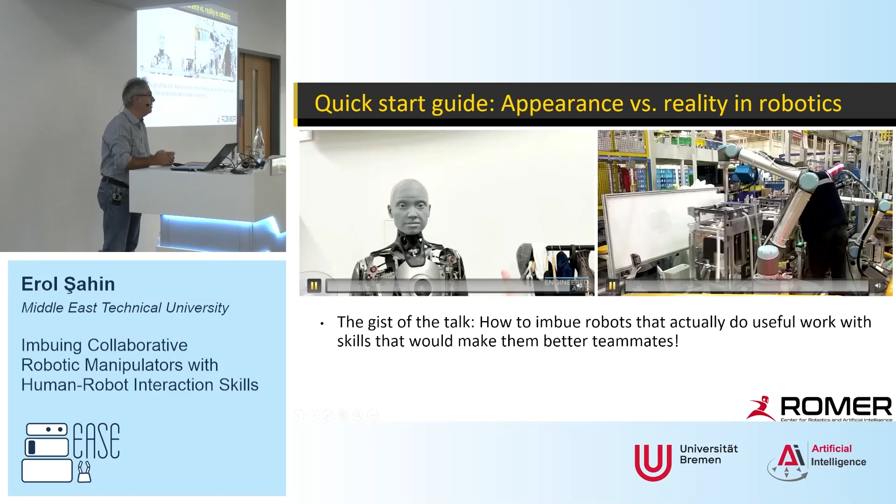And for this, as I said, if my video works, I'll show you. Again... see if it works, okay good. So, and now it's, okay good, let's see.

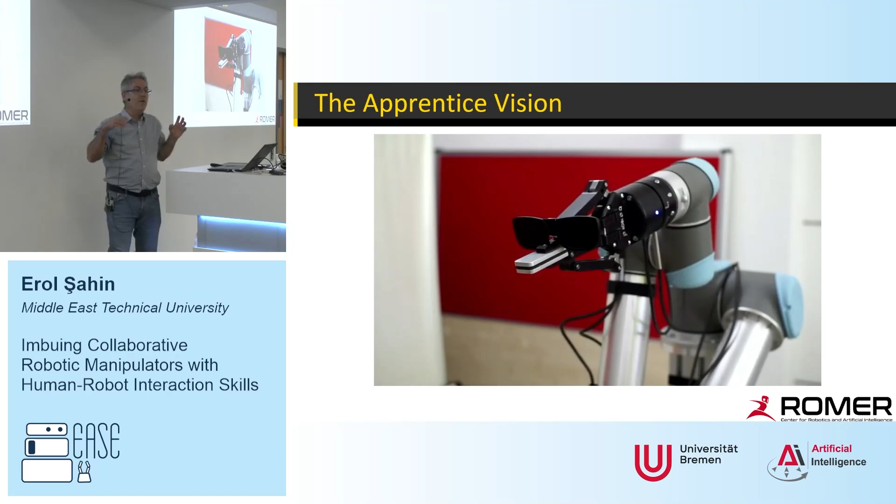Good, okay. Now my motivation in this line of work is that when you look at these robotic manipulators, and when you go to the actual assembly lines, you see that whatever those workers do in terms of manipulation is beyond what we can imagine to do with actual robots. So the best that we can do for us is to aid the worker.

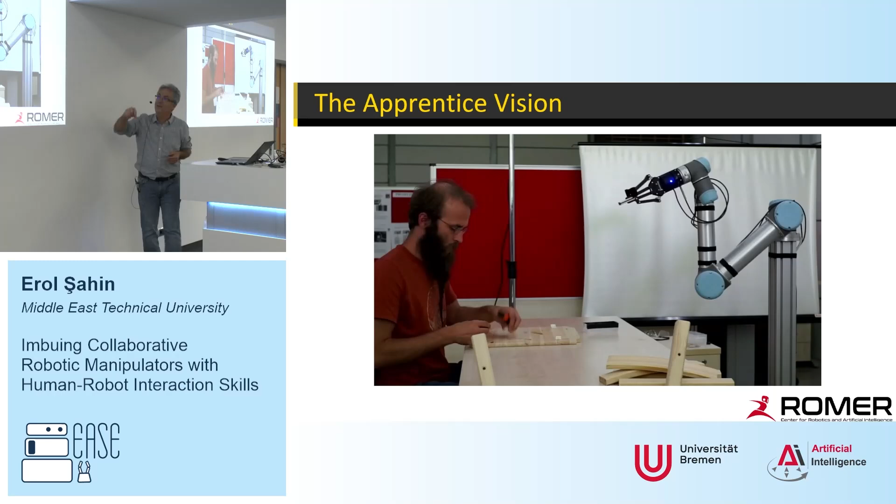There's this assembly worker, and in this case we have this scenario where my student is assembling an IKEA chair. Look at the manipulation tasks that he's doing. Can this robot do it? No. Will it be able to do it in the near future? No, okay? We have these nice hands, but you don't see them deployed. When you go into the industrial side, you have these jaw grippers, they sell for quite a large amount of money, and they just have one degree of freedom like that.

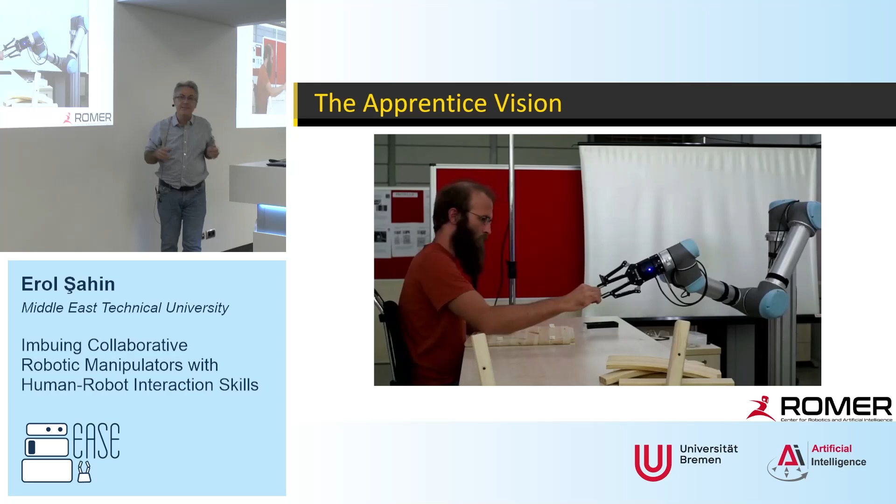And as such, there's no way you can do this unless you have some attached tools that are really specific for this task. So the idea we had was, instead of robots doing the work, why not have the robot work like an apprentice, just giving the worker the tools and the parts, such that instead of this guy carrying out his work in 60 seconds, if you can make him do it in 50 seconds, that's a 20% gain right there, okay? So that's the idea.

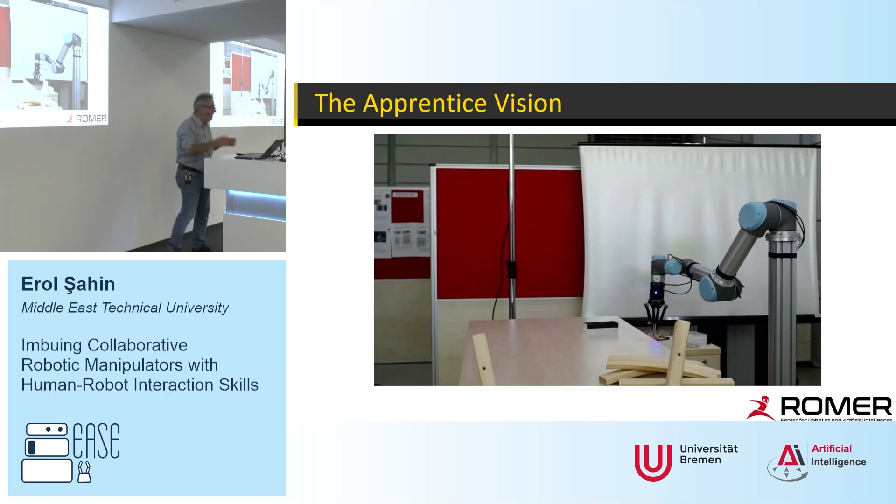But when you do this, this robot will be a companion, and it needs to be a little bit smart. It needs to understand how the human is doing the work, his state, looking at him, because maybe he's doing it at his own pace. And it needs to have really basic nonverbal communication such that they can have some kind of a connection. So towards this, this is our kind of trailer scenario. I'll show you one more video, and then I'll move on to the last thing, to my actual lecture planned today.

Which is here. Now I want you to, again, good, okay. So this is the view that you see from your glasses, this is your first-person view, okay? So does it come alive?

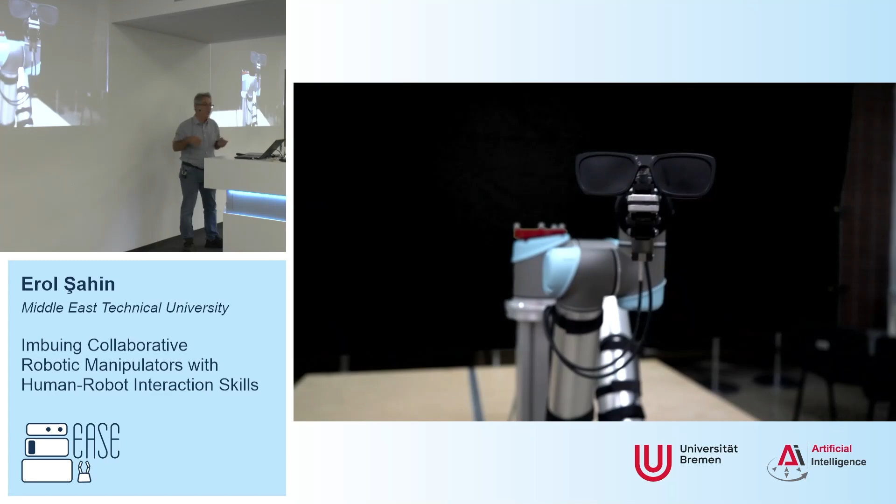Huh? Okay, so what it's doing is it's tracking the human. We have this motion capture, but you can do this without it. And then we just have this gazing, it doesn't have eyes, these glasses are dummy, okay, it's my old sunglasses that I attached there. But even with that, you see the iCub, and as I said, it has these nice basically eyes which follow. But what you've seen was that directing the gripper to someone induces a gaze.

You feel the gaze on you. And if you just make it kind of like this, then you just feel like so live and so fluid. Then you get much better human-robot interaction than you would get with a nice thing.

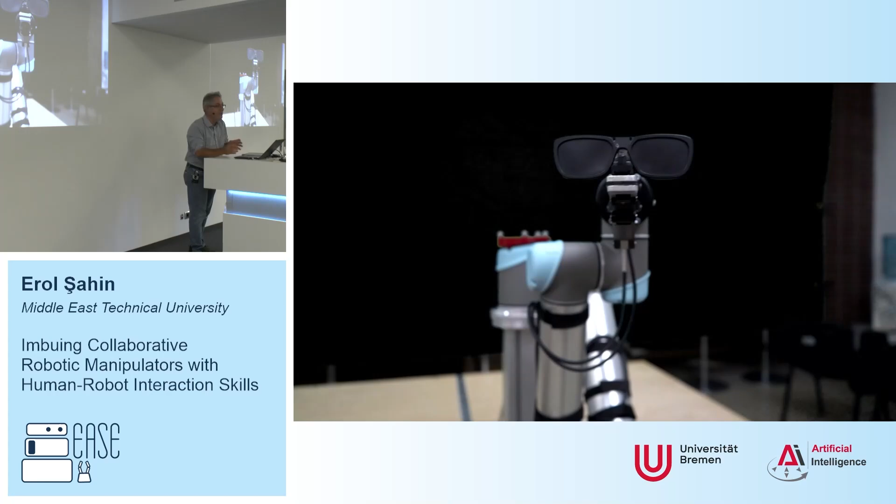With this, basically, what I will do is I will stop here, and if you come to my lecture tomorrow, I will move on to my actual lecture that's planned for today.

Okay, which is this. Let's see if I can. Good. Yes. Okay, so I was asked, I didn't realize this was kind of like two different phases, and I was asked to... no, why is it not showing up here? All technical. I don't know why. Now it's here. Okay, the projector problem, that's the NP complete problem that will never ever get solved in our lifetime. We have new connectors, new projectors, new interfaces. The problem still is there. It gets even more worse.

So I will give you an introduction about these robotic manipulators, which I'm working on. And in doing so, I was told that this audience was more knowledge representation, basic background. So I'll try to be basic. If you know it, it may bore you. If you don't know it, it may become difficult to you. So I know that I will never make all of you happy. I apologize for that in advance. But I'll try my best to give you an idea of what it is, what is required, the basic concepts to do that.

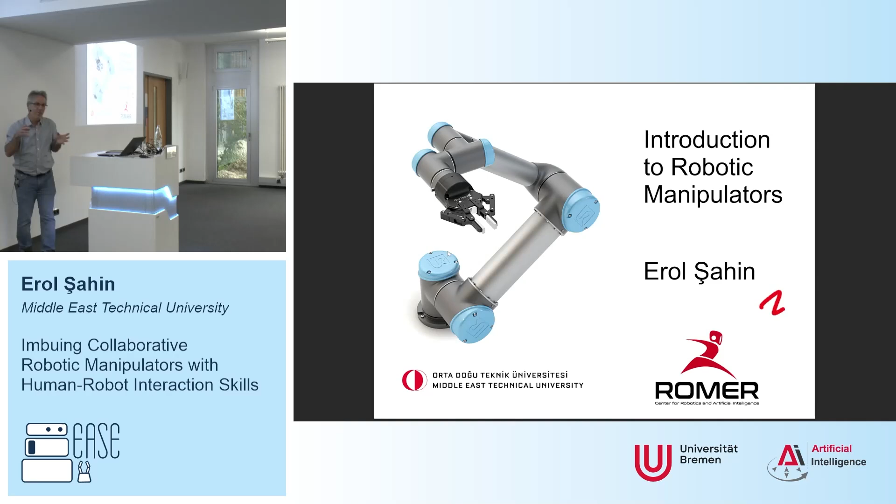So I'll give you a brief lecture introduction about robotic manipulators and introduce some concepts. As I said, this may bore some of you. So, arm type robots.

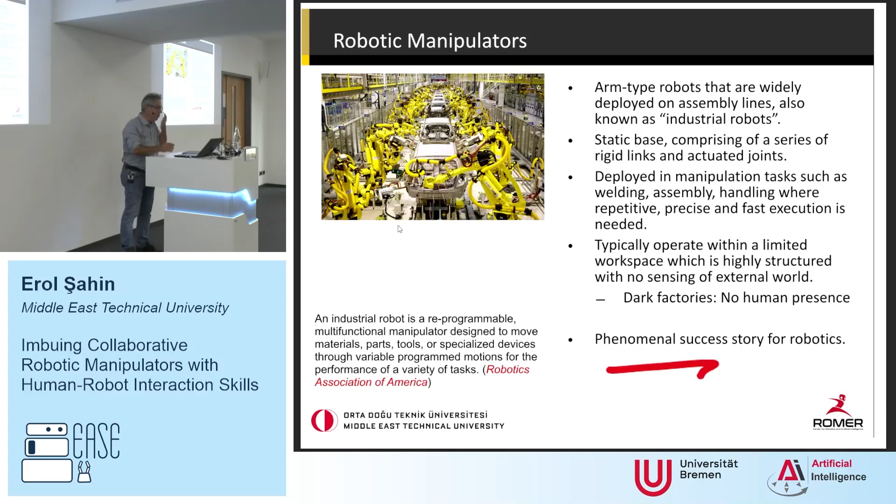Okay, these are the real workhorses for robotics, and that's actually the main success story that has been pushing all this robotics research. It mainly consists of a static base, comprised of a series of rigid links and actuated joints, typically deployed in manipulation tasks such as welding, assembly, handling, where we need repetitive, precise and fast execution of tasks. Typically they operate in a very limited workspace, which is highly structured, just like a welding or assembly line portion where there are no humans and everything is done with no human present.

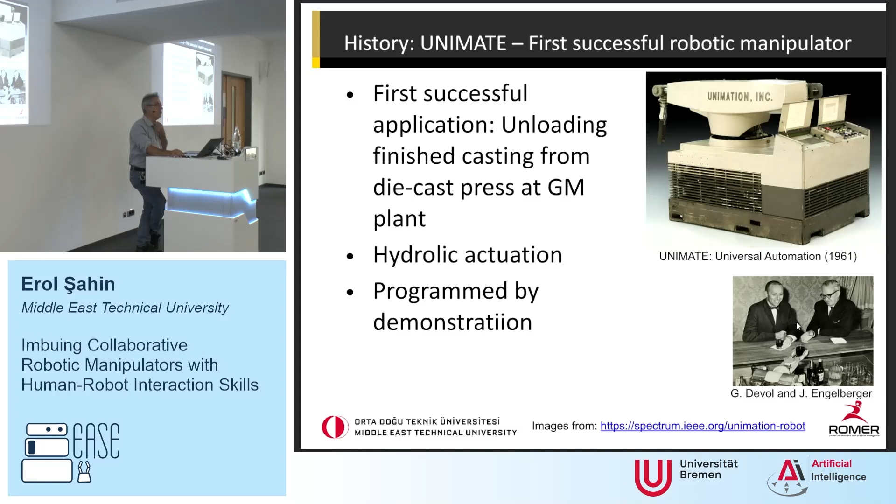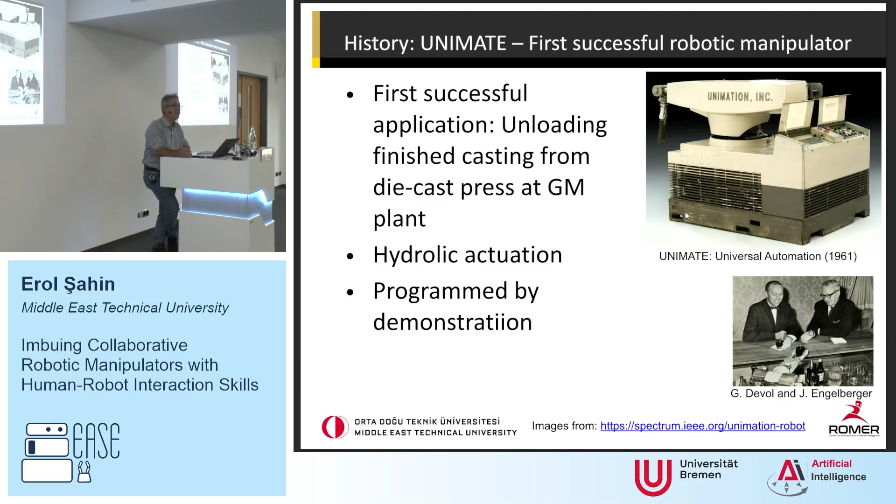And this is basically a phenomenal success. When you look at this story, the first industrial robot, when we say arm type robots, you can replace it with industrial robots, designed by Engelberger and Devol. This is the first one that was made, and it's a huge beast. It was used at GM's factories to unload the finished casting process. It could carry something like 40 kilos, and it used hydraulic actuation, and it could be programmed by demonstration. There are a lot of nice videos about this.

Now, what do we have basically in these robotic manipulators? Well, first off, what do we mean by manipulation? Manipulation means moving things in space, like moving an object, like pushing this, etc. Now you can contrast this against navigation, where you move, whereas these guys don't move, but they move things. So that's what their job is. That's why we call them manipulators.

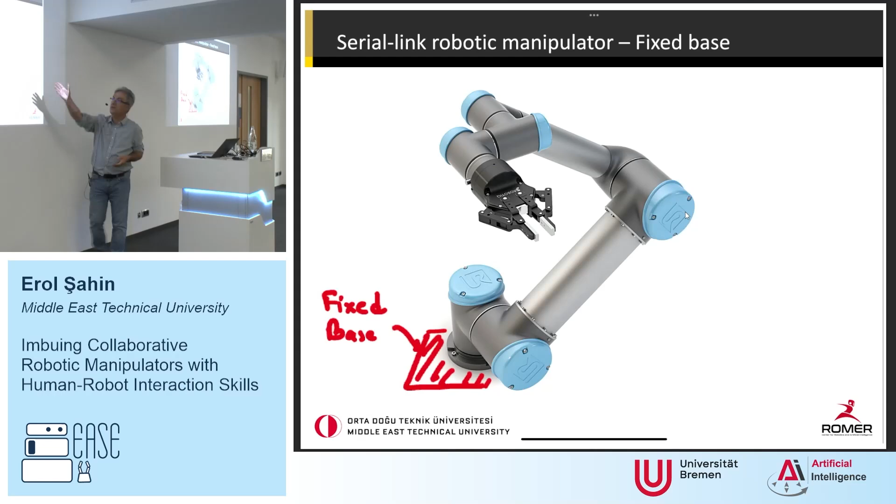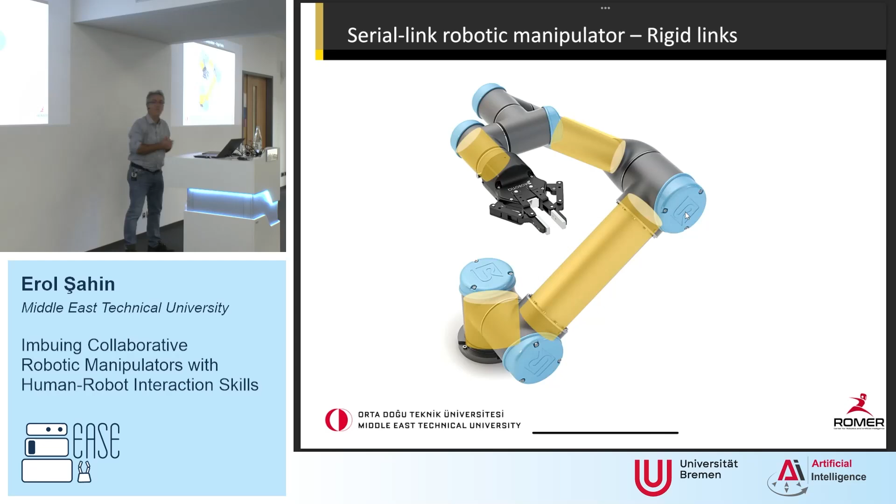And this is a commercial manipulator. You have a fixed base where you attach them. After that, along with that, what you have is a series of rigid links which are then connected by joints. And when we say joints, basically when you attach two rigid bodies to each other, which I'll tell you what it is, these joints limit their ability to orient or move with respect to each other.

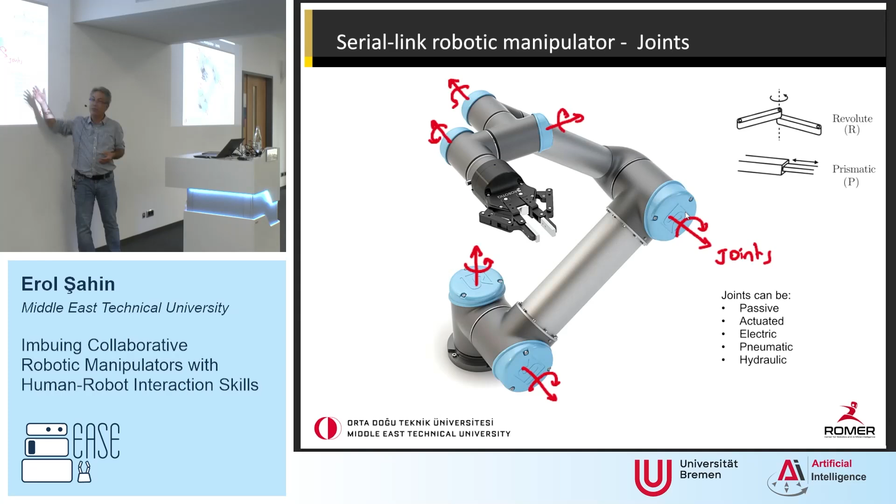And here you can see all these red caps, each of them is a joint. These joints can be passive, like for a door hinge, for example, that's a joint, and we call this a revolute joint, or we can have prismatic joints. There are other types of joints, but these are the most basic ones. In prismatic, you basically move linearly, as such. And in this particular one, it has six active actuated joints, which can be actuated by electric, pneumatic, or hydraulic.

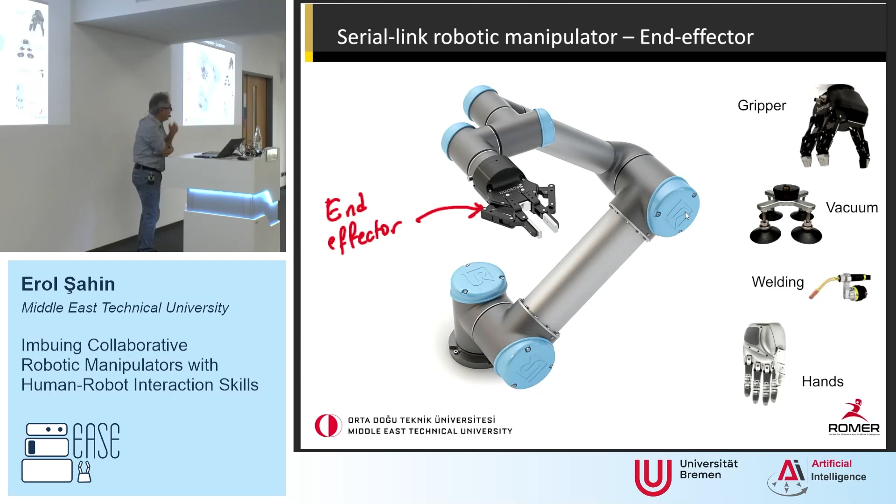And it has an end effector. The end effector is basically where the manipulator does things or manipulates things. This is typically what we focus on, and it's designed for the task at hand. It can be a jaw gripper, a three-finger gripper, a vacuum, a welding tool, or an actual hand, whatever you put in there. Usually our goal with these manipulators is to do the manipulation with this end effector, and for the rest you try to avoid any kind of collision. That's basically the game. Of course, there are some exotic studies where you use the arm itself to push things, but usually we just stick with this end effector.

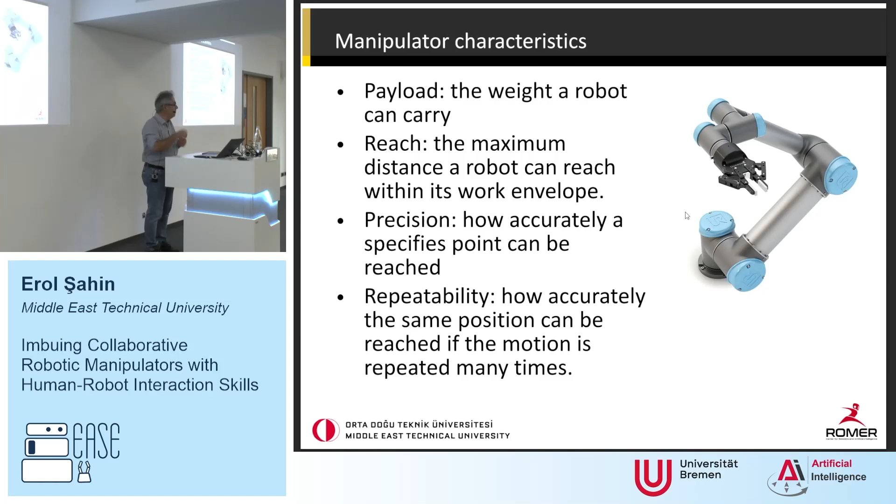When you look at these arms, there are different specifications. There's the payload, which is how much it can carry. Typically when you buy this arm, you buy the end effector separately, so that also includes this hand. Then there's the reach, the maximum distance a robot can reach within its envelope. Then there's precision, meaning how accurately you can reach a specified point, and repeatability, which is related, but asks: if you give the same commands, what's the probability that you'll end up moving your end effector to the same point? And the workspace depends on all of this.

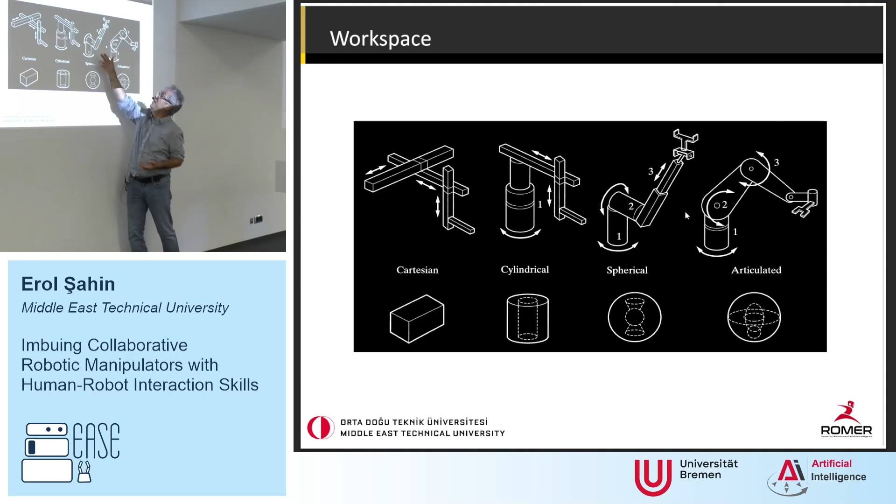Another example is where you have a cylindrical base, and then two prismatic joints up there, giving you a cylindrical workspace where you can manipulate things. Or if you have a spherical design, then that's your workspace. So, depending on the length and relative positioning of the links, as well as the type of joints, this basically determines your workspace.

When we work with these robots, we typically have different spaces. The first one is the world reference frame. This means that sometimes when you have a task, like I want to reach this point, that point has a coordinate. When you talk about the world reference frame, you specify the task without taking into account the robot, meaning I want to go to this space, and I don't care about what the robot is or whether it can do that.

Then there's the joint reference frame. For example, consider this universal robot arm I've shown you. It has 6 actuated joints, meaning all these joints can rotate, say, from 0 to 2 pi, all around. So you have 6 theta angles for the joints, and whatever you do, you have to determine: here's my current thetas, I want to move to this point, and you design that basically in that space. We'll see that this space can be handy for, for example, planning, which I won't get into now, but maybe we'll discuss it.

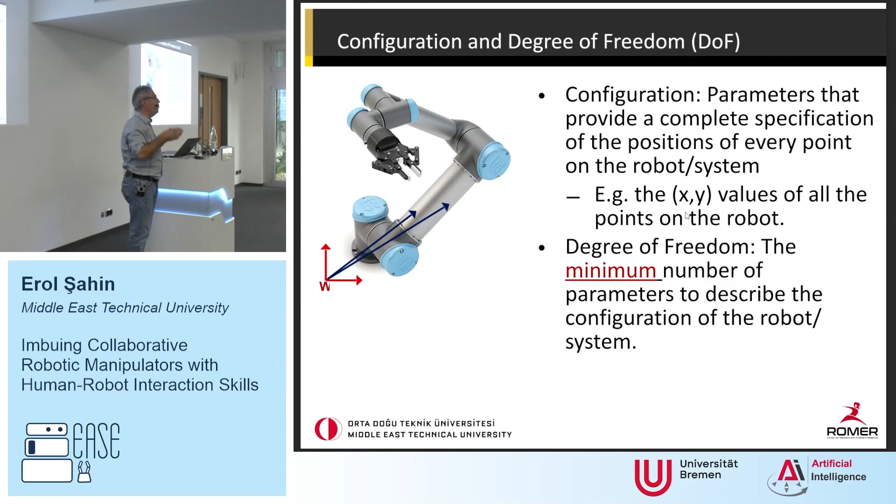It will be a very dense representation. And regarding that, we say that we'll try to find the minimum set of parameters that is sufficient to specify or describe the configuration with minimum terms.

In this case, for example, a robot, we have these 6 joint values, which tell how much a link is rotated with respect to the previous one. That gives you 6 angular variables, all between 0 and 2 pi, and that is actually sufficient, because everything else, such as the length or width of the links, you can derive from that, since they don't change.

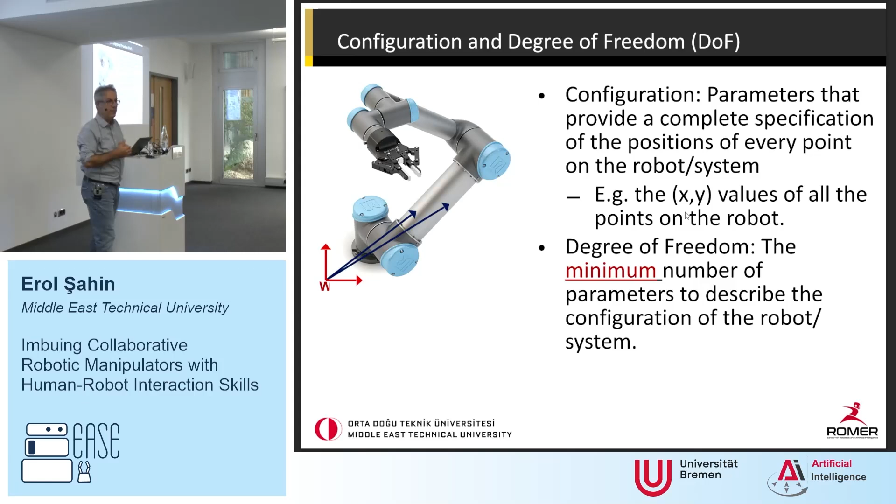So we call this the degree of freedom. In our case, if this robot has 6 degrees of freedom and they are all actuated, it means you can control your robot with 6 degrees of freedom.